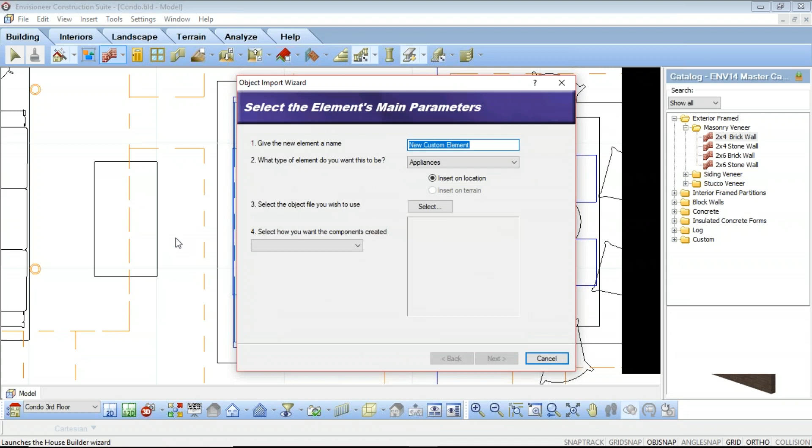To do this, we're going to first go to File, Import, and select the Object Wizard. This will bring up the Select Element screen for your main parameters. Here we're going to give the object a name. In our dining room, we're going to create a little buffet table off to the side here, so I'm going to call this Buffet Table.

Then I'm going to make sure that this is under the elements tree that I want. So I don't want this to be an appliance, I want this to be interior furniture. This is important because when I want to save this to the catalog, this will dictate where that element actually goes. Again, make sure it's going into the correct folder and that it's interior furniture. Depending on where you want this to go, you can also insert this on the location or on the terrain. By this one, we're going to insert it on the location, and then I'm just going to hit the Select button.

This will then allow me to specify the block that I actually want to import. On my desktop, I've already got this buffet ready to go, so I'm just going to select Open. Once I hit Open, since we're importing a SketchUp block, it's going to ask me to force the import of the SketchUp block to be single-sided. I would always recommend doing this simply because it will help reduce the size of the block you're importing. To give you a little background on what this is, I'm just going to open up SketchUp real quick.

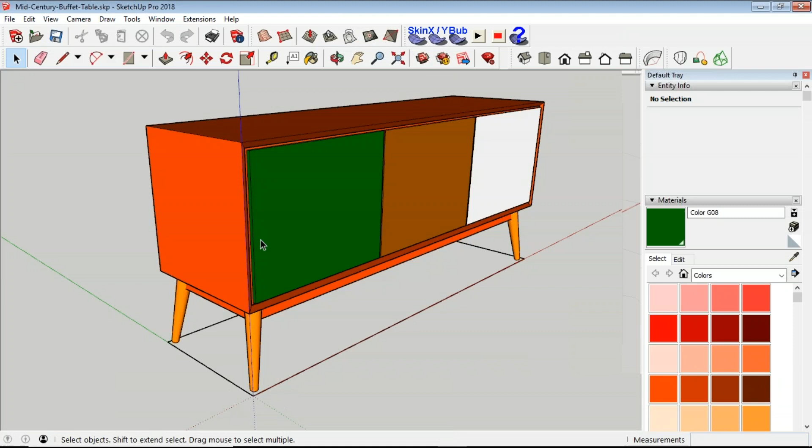In SketchUp, every element that you create has a front side and a back side. What we're basically doing in Envisioneer is saying we only want the front side. To determine what the front and back side is in SketchUp, if you're creating your own blocks, simply go to View, Face Style, Monochrome, and you can actually see the actual faces themselves. So here we see a nice white face. This is telling me that this is the front face of the object.

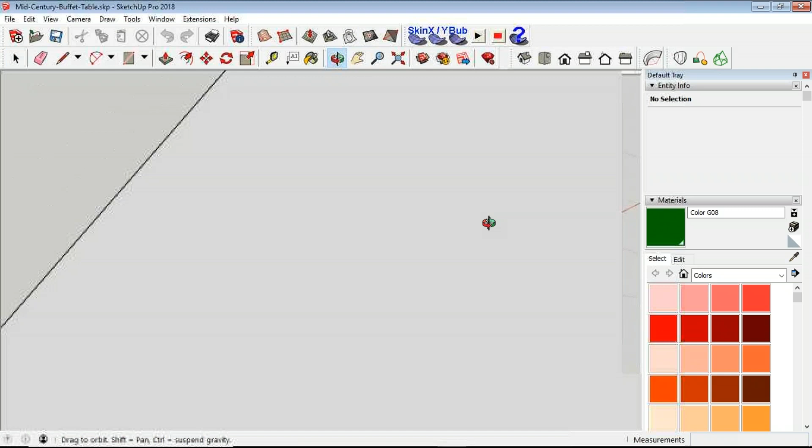If I was to zoom inside, we would see the interior side of this, and we can see that there is more of a purple hue to the blocks themselves, like this over here. That is telling me that that is the reverse side. So if you ever see an exterior side of a block set up to have a face that looks purplish, that is going to be the wrong side. And when it comes into Envisioneer, it will be invisible, you will see through it. So again, if you're creating the blocks yourselves, make sure that the white side is facing out.

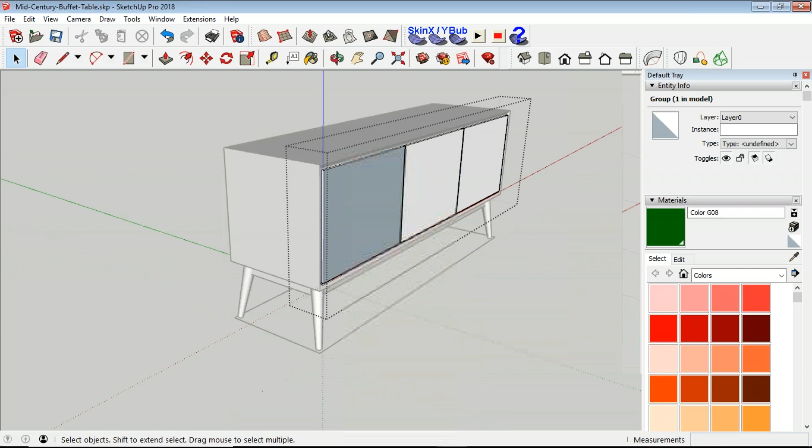If it's a block that you found online, you can open it up in SketchUp and edit it to make sure the faces are in the correct direction, so you're not going to be missing any faces. To do that, you simply select the face and reverse it, and it's going the correct way. I'm just going to go back into Envisioneer, and again we're going to make sure that we have this set to single-sided.

Select Next, and now it's going to show us the actual block. I want this to be sorted by materials. If you're importing a DWG, it could be set to by layer, by material, or by color, so you can adjust those as needed. But again, we're working with a SketchUp block, so it's going to be inserted by material. The colors you see here denote the different materials, so we're able to give each of these colors a different material if we want to. I'm going to say Next.

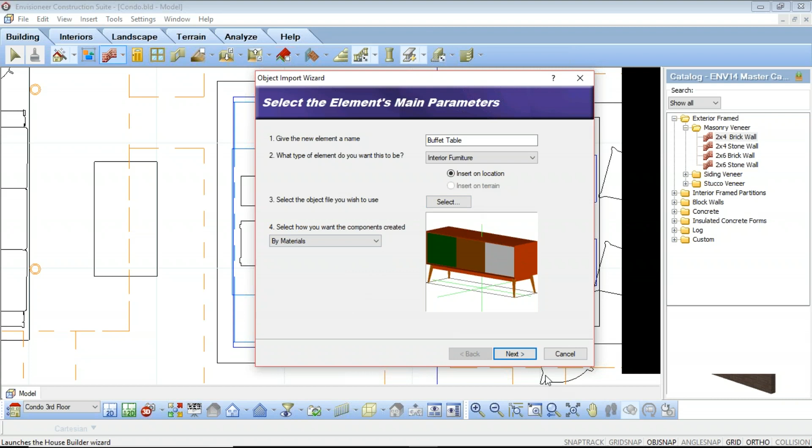This is just going to give you the ability to orient the object in the view that you're working with. The way I like to describe this is picture the red as being your floor and the blue as being your wall. For example, I want the back of my buffet to be up against the wall, so I can rotate this all the way around to see what side is going to be best up against the wall. And that is going to be this orientation here.

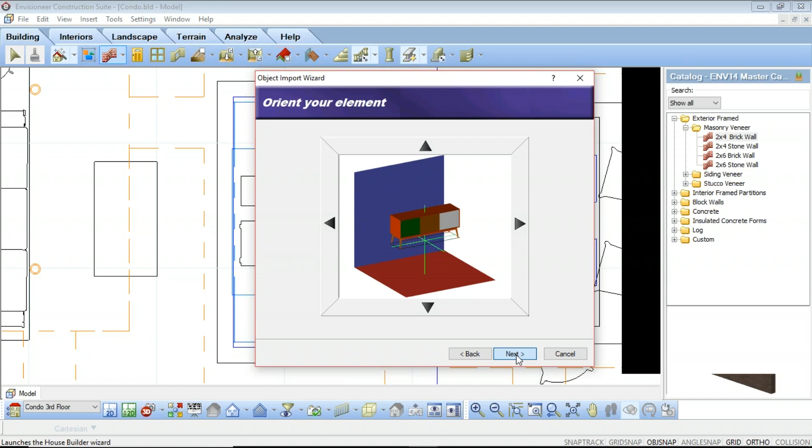I then click Next, and now it's going to ask you to control the component visibility in 3D. Here I can go through and specify the actual name and what I want to be visible in 3D. By default, since I created this block in SketchUp with a 2D plan view, I'm making sure it's on the SketchUp Edges layer. So I'm just going to make sure that says 2D plan view, and I do that by double-clicking in the edit box to edit it. And I don't want this to be visible in 3D, so I'm just going to close the eye.

Another thing I always do in my SketchUp block is leave a default SketchUp color, so one object or portion of the drawing is always that default color. Since I can't delete it, it always comes in with a SketchUp block, so I take advantage of that and make sure it's actually part of the block.

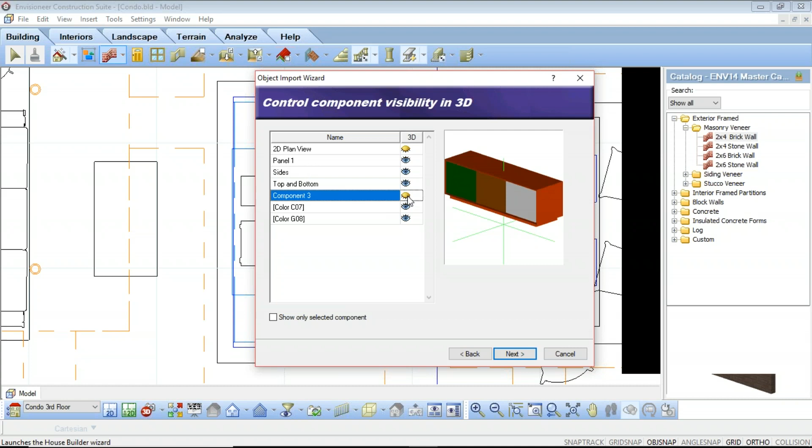Here I'm going to call this panel 1, and then you can start turning off elements so you can see what they actually are. I'm going to call this one sides, and this one top and bottom, and this one legs. I'm going through and naming these so that when I import it into Envisioneer, I can easily see and distinguish what each of these materials are. This will be panel 2, and this one should be panel 3.

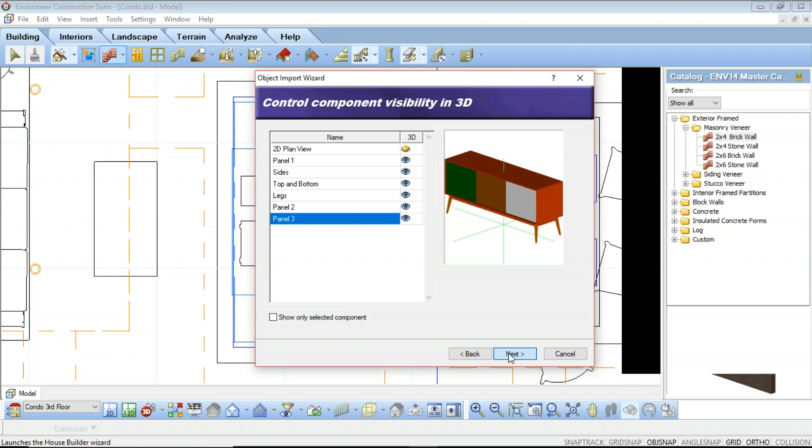I simply click Next. Now it's asking what you want to see in your 2D view. I don't want to see all this information in my 2D view because I've created my own 2D plan view, so I'm just going to have that visible. If you do not have a 2D plan view created, or it's a block you found online, you'll have all of these eyes closed and you'll notice you cannot click through. You will need to create your own plan view.

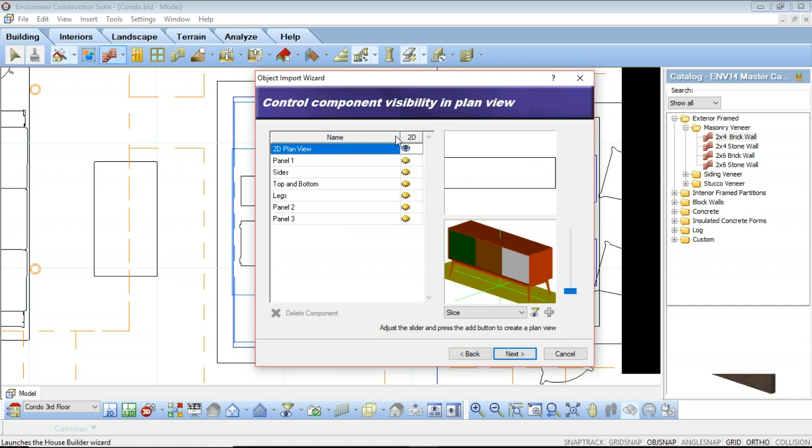To do that, you can use the Add Outline, or you can create a slice. The slice will allow you to slice through the object to create your 2D plan view of how that's going to be visible while working in your 2D plan view design. Again, I already have a plan view, so I'm just going to use that and click Next.

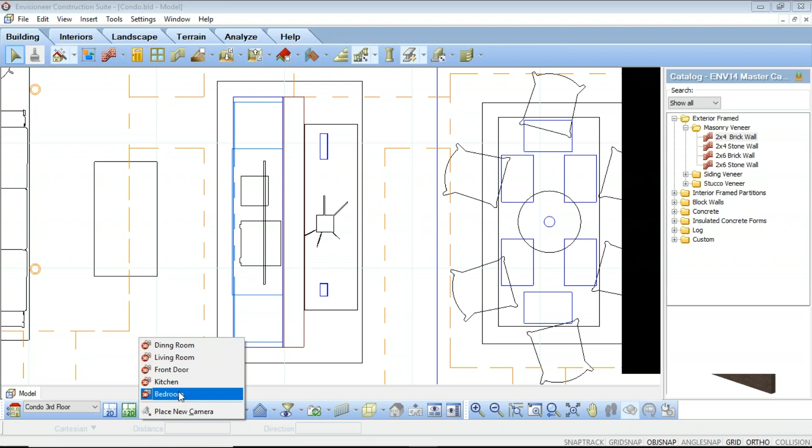Now I'm going to select Finish, and attached to my cursor is that buffet table. I'm just going to drop it in, and now I can select it and rotate it around to where I want it to go, and move that into place. I'm going to quickly go into a 3D view into the dining room, and I can see here that I have my buffet table in my design, but it's using the wrong materials. I can fix that by simply double-clicking on it.

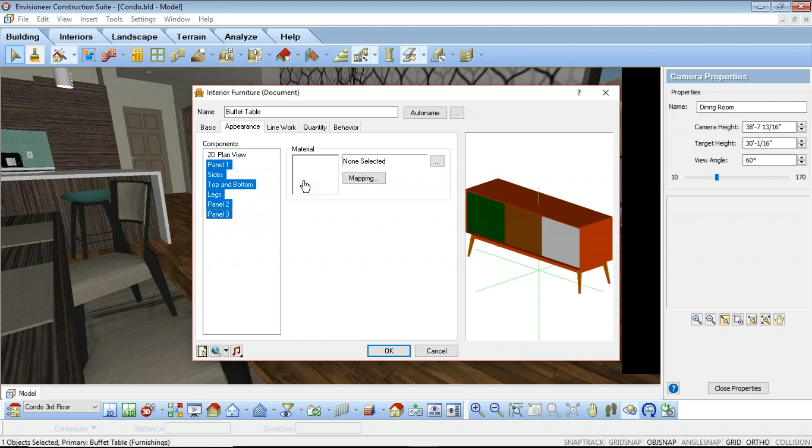Then under the appearance, I can go in and start editing the actual elements within that block. I'm going to select all of these options here, and I'm just going to give it the same wooden material, or I could go through and specify different materials for different elements. First I'm going to go in and select the material, and we're just going to use a wood material here. I'll go to cabinetry, then cabinet mantel stains, and select a dark stain and say OK.

The other thing you want to take advantage of is the mapping. Under mapping, you can specify how you want this to be mapped in your drawing. By default it's set to predefined because it's coming from SketchUp, but I actually want this set to box, and it will change the way that material looks. Now we can see the actual grain of the wood.

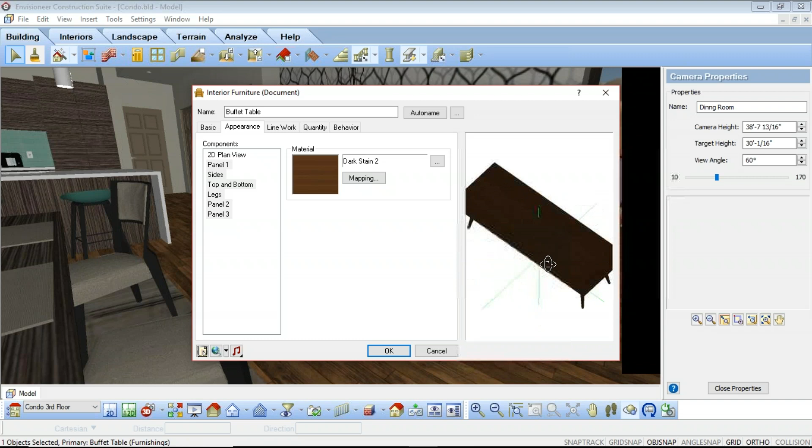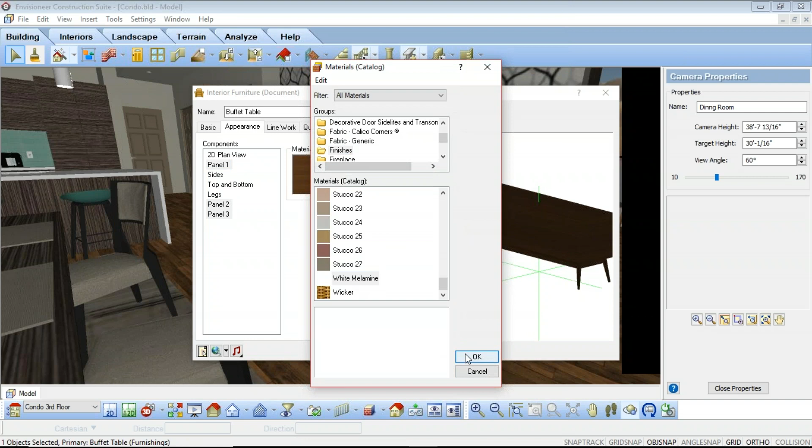Like I said, I could change this so the panels are a different color now because they are their own material. So let's say I want these to be like a white melamine shiny material. I can just go into finishes now for just those panels and say I want you to be white, like so. Now I have more of a modern looking buffet table, and I can just say okay.

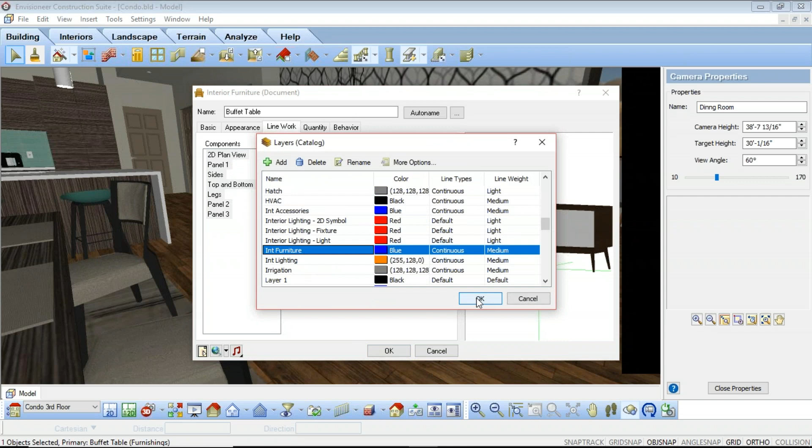You can also go through and specify your line work, so if you want to make sure the line work looks correct while working in your 2D plan views. Because I want this to denote my interior furniture, I can just say interior furniture layer, and it will be blue in 2D. Under quantity, I can give it its own quantity information with its own part number.

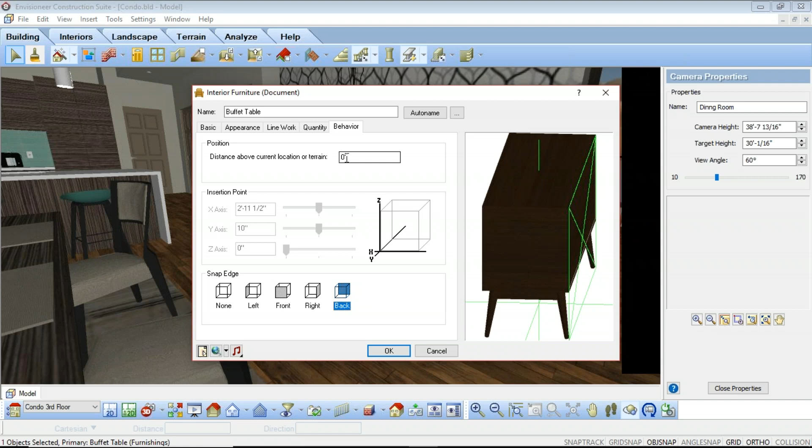So if I want to do a quantity report on this, it will pull up the correct part number for me. I can also specify the behavior of the object so that if I always want it to snap to the back of the element, I can click the back, and it will always snap the back of that buffet table to my wall. I can also elevate it so it sits at the correct height. Since this is a buffet table, it's going to sit on the floor anyway, so we'll leave that at 0 and say OK. It's now adjusted that for me in my view, and I've created a brand new buffet table.

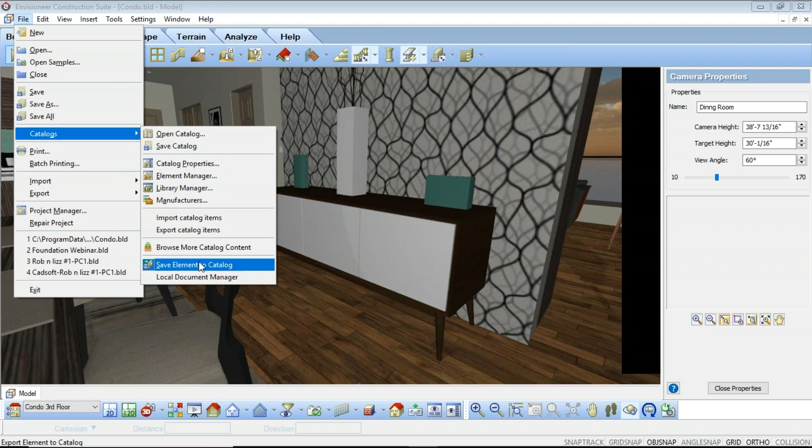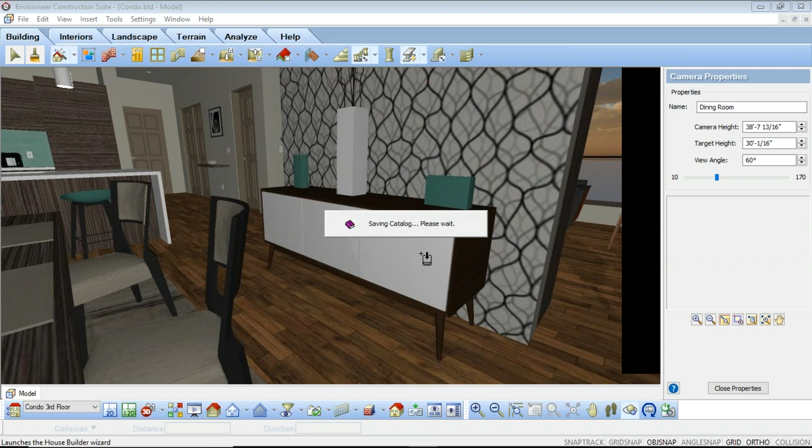Now this buffet table is only a part of the drawing. To get this to be part of my catalog, I need to go to File, Catalogs, and then Save Element to Catalog. While I created this, when using the Import Object Wizard, I specified that I wanted it to be part of the Interior Furniture folder. When I click on this, it will ask would you like to save the buffet table to the catalog. I'm going to say yes. And it asks would you like to save anything else. I'm going to say no. And it's now saved that buffet table to the catalog under interior furniture.